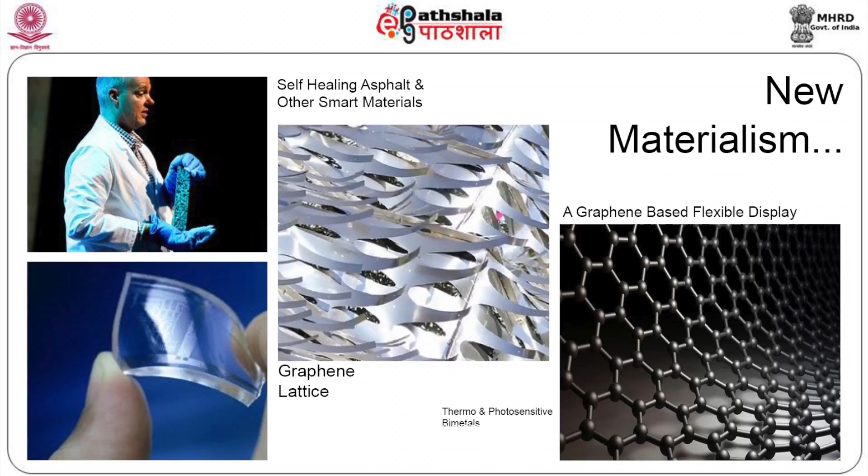Given that buildings are now no longer just buildings, they're also canvases for electronic images to flow, and any photographs of places like Tokyo or Hong Kong will exhibit that, and even Times Square in New York exhibits that really profoundly.

There are materials that haven't really been explored yet, like aerogels, the lightest artificial material known to man. These display fantastic properties of insulation which could really change the way we use energy in cities, and also perhaps change the way we build cities, with a direct impact on urban form, simply because a number of components of architecture that we now deem necessary would no longer be relevant to us.

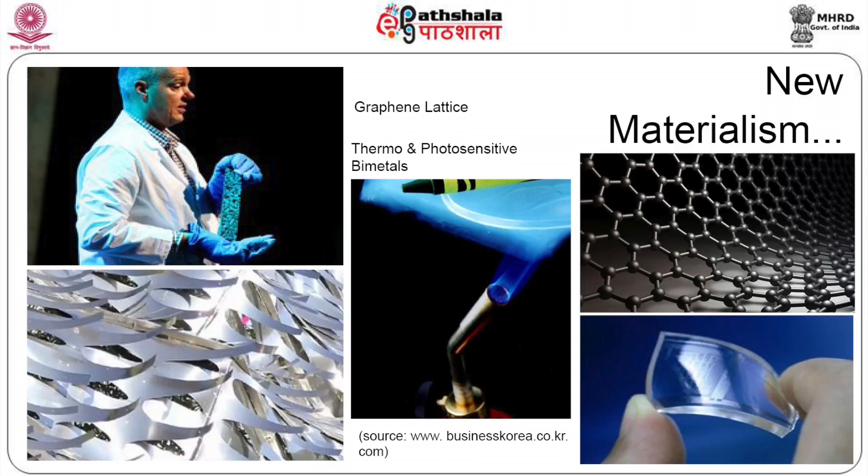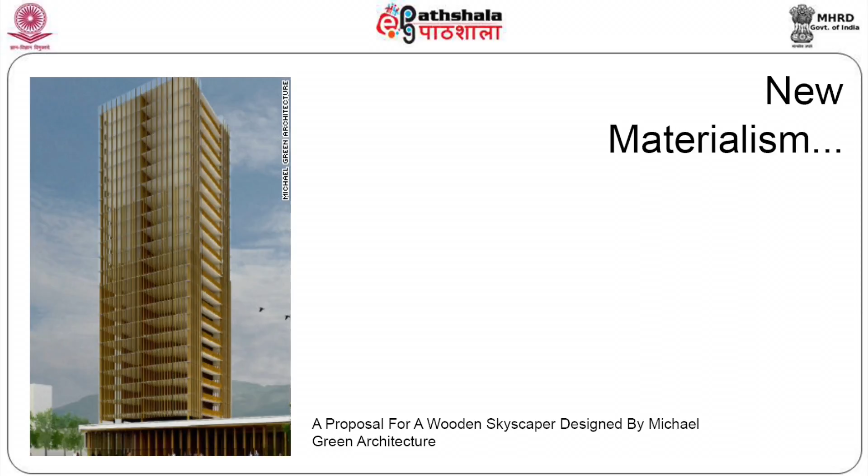And this is possible because we now have ways of strengthening the wood, making it fire retardant, and preventing insect attacks. Therefore, these old materials could be regenerated into something radically different, creating something that would be perhaps new but old at the same time.

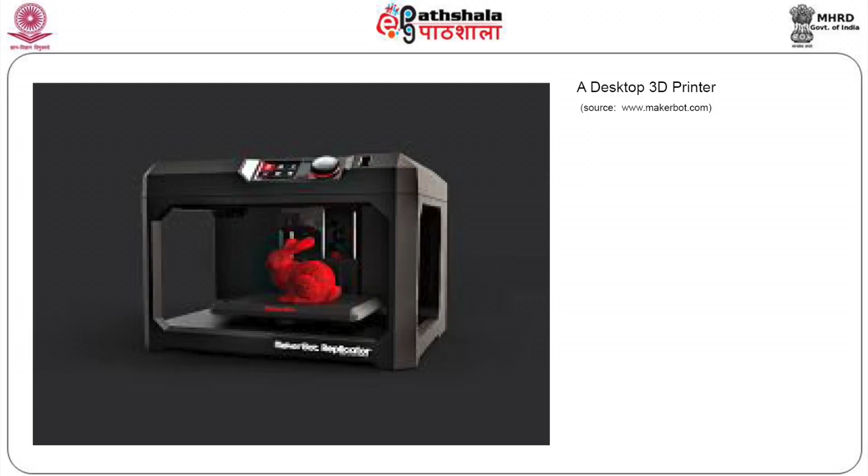Current technology that is very much on our doorstep is this concept of 3D printing. Now, 3D printing is an idea that has been around architecture for a while now. People have been printing small things, like that small bunny you see, for nearly 10 years now.

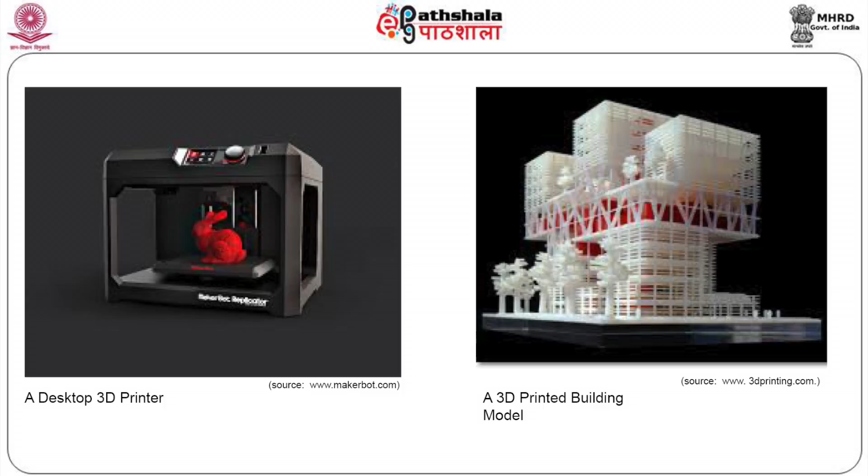And architects have already found uses for it in the building of models, creating a far more accurate model of buildings and spaces vis-a-vis perhaps a more human creation, such as manually built models.

This idea is now experimenting by taking it onto an actual scale, the scale of architecture, and we're already talking about components of buildings being printed three-dimensionally and then assembled at sites.

This is an idea that will radically change the way we build buildings, but it can also have great potential in terms of creating things like emergency housing, reshaping the way we perceive architecture, and ultimately perceive urban form as a conglomeration of smaller architectural forms.

This idea is a concept that is going to attack our consciousness in a very profound way in the next few years. As architects and urban designers, we need to engage with this particular form of technology and production to create something new within what is already an existing piece of tech.

Ideas of technology in the last decade and perhaps two decades is mobile technology. We have seen our devices get smaller over the years, and we have seen them become interactive and far more flexible in the last few years.

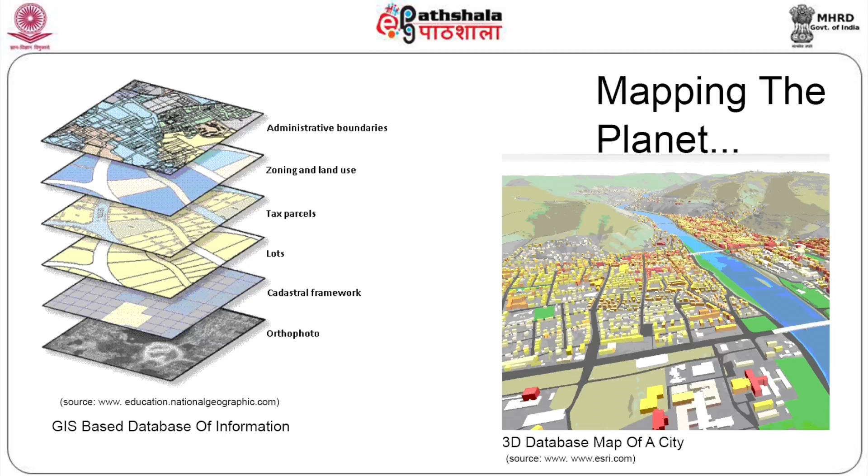An aspect of mobile technology that has emerged in the last few years is a concept called augmented reality. Essentially, this is an idea that stands between virtual reality and unfiltered perception. Augmented reality is essentially normal perception of space with data added to it.

A famous example of this is the Google Glass, which is something that has emerged in the last few years. The Google Glass essentially allows you to look at spaces that are available everywhere, but it also simultaneously overlays information such as weather, addresses, and so on, on top of your perception of what is actually there in front of you. This has great potential for our understanding of and interaction with environments.

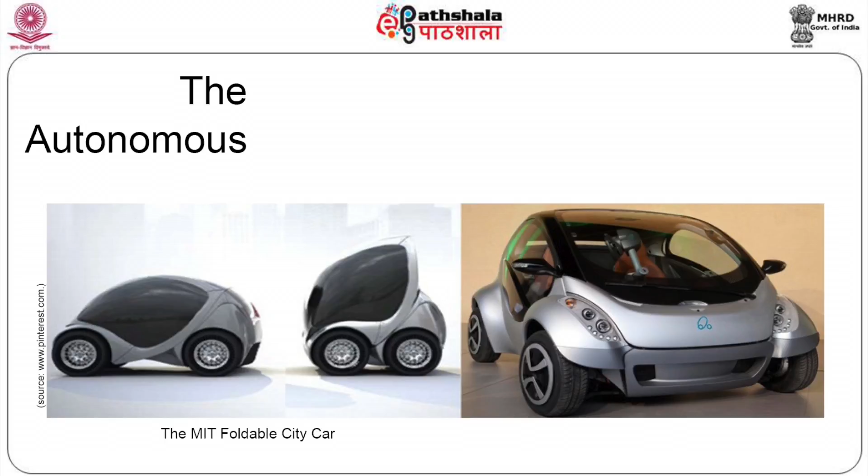In a more immediate sense, we already have vehicles that occupy lesser space and are essentially hyper-compact, like the city car proposed by MIT, which is a foldable vehicle that can fold and be placed to take up far lesser space than a normal car, simply because of its flexibility in form. This will have a perhaps unpredictable impact on the way we use movement and parking in cities.

And this is a very crucial aspect of urban design, because we are looking at large spaces of parking in the hearts of cities perhaps being used for something else. We can perhaps look at a kind of renewal of lost spaces that can be discovered and put to a more productive use.

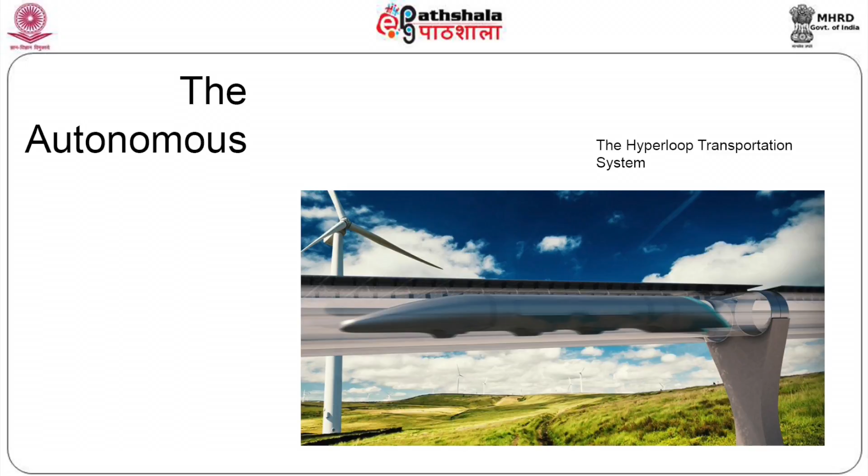There are technologies and concepts that exist in perhaps the far future. This is one of the Hyperloop proposals in this ongoing ideas competition, which deals with a system that can traverse cities and inner cities through a hyper-fast vacuum-based system. This is a concept that could once again result in changes of a completely unpredictable nature in the future of urban form.

An interesting idea whose time has already come is the emergence of the drone, or remote-controlled vehicle, as a method of delivery. This is an idea which has proved very successful in military applications, and we see the emergence of a number of commercial applications as well.

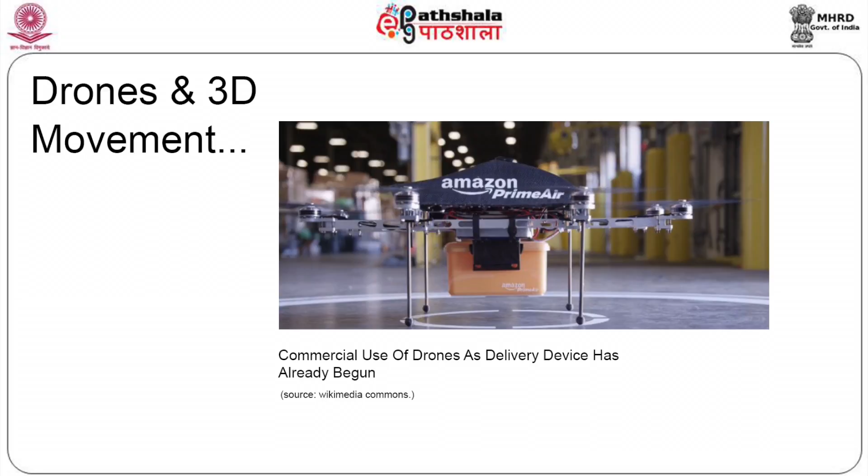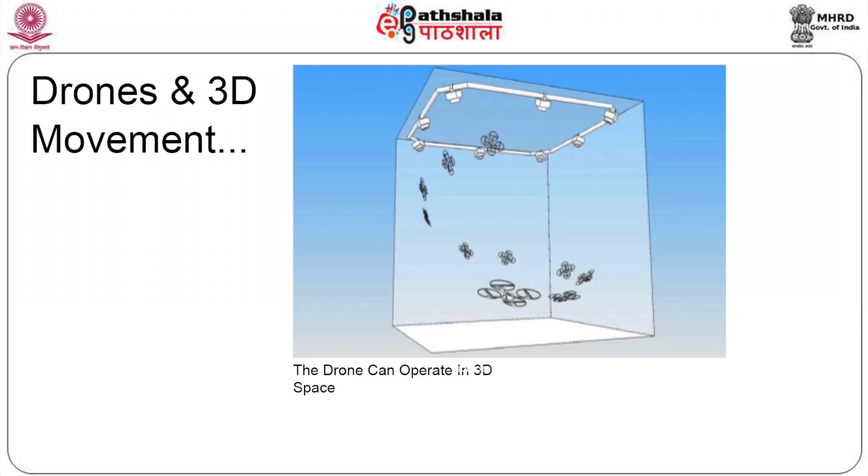But the drone is significant not for its ability to deliver objects, but the fact that it uses three-dimensional space to perform what are essentially regular tasks in an urban environment. If drones can radically change the way goods are moved within cities through three-dimensional space, we are now looking at movement in the city not just as a two-dimensional experience, but starting to see it as a three-dimensional one.

We're heading perhaps in some form towards some of the visions we saw at the beginning of part 1, ideas like the Jetsons, where we can probably start to look at three-dimensional movement through jetpacks or something like that becoming a viable mode of transport, because of our experience working with these drones, these remote control drones.

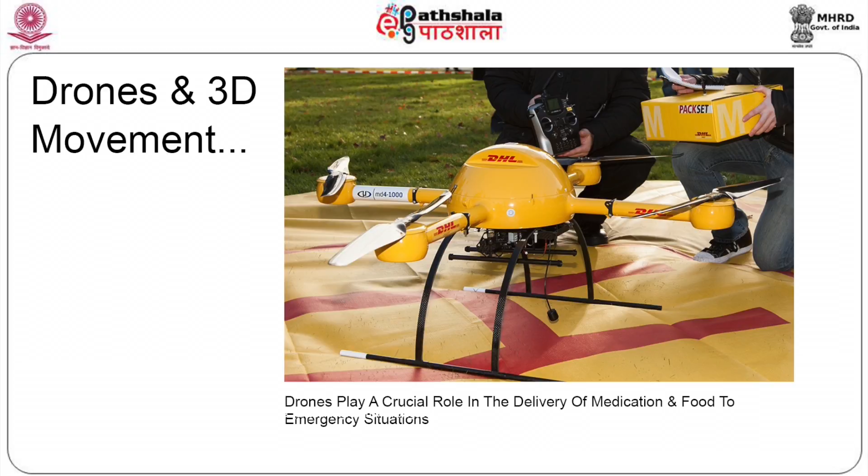They present a very interesting challenge as well as an opportunity to urban planners and to other form makers like urban designers. We've already seen, and this is another example of a drone supplying medicine and food to remote areas. This has immediate and almost infinite applications for the delivery of products and services.

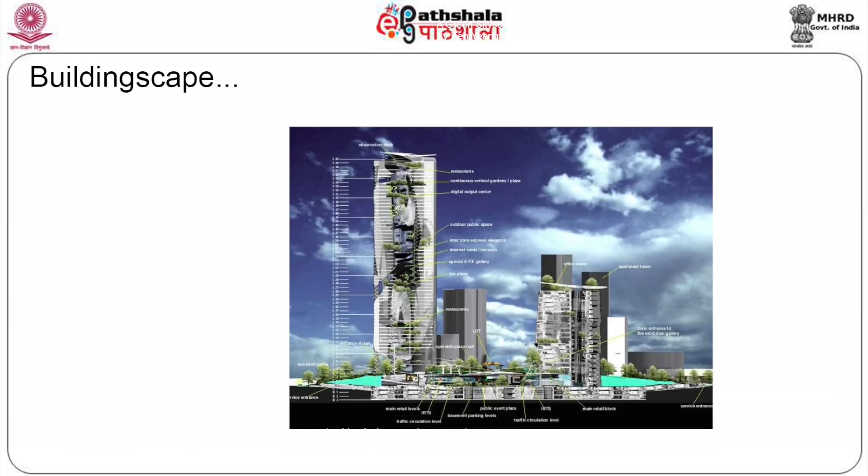Let's talk a little bit more about emerging concepts that are coming. An idea that has been floating around is radical landscapes embedded in buildings, such as Ken Yeang's many proposals over the years. We are also talking about buildings being infused with landscape, not just being settings for it, as in this project by Michael Joachim.

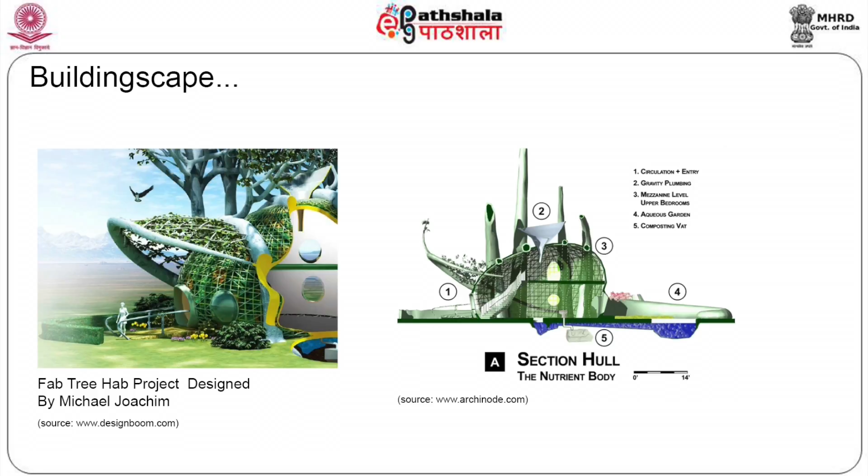Applied to an urban scale, this intrigues us because we can now build natural environments into artificial environments, and then start to connect all of these artificial environments, as seen in this very complex proposal given by Arup.

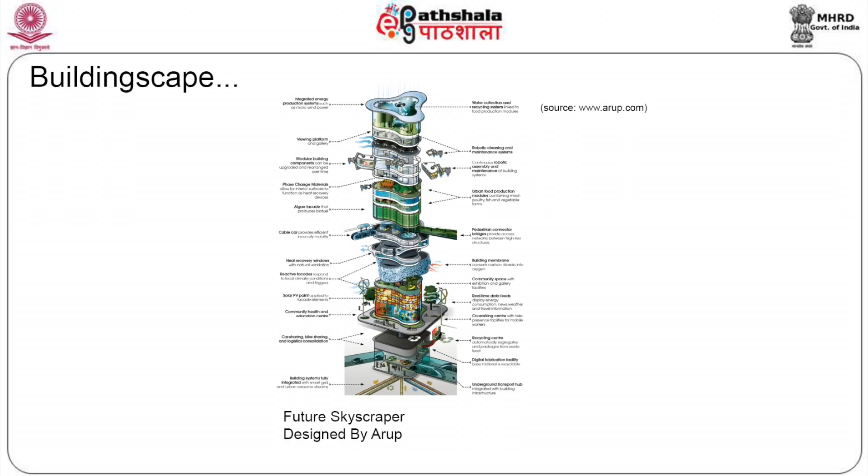You can start to see that buildings are becoming more than just buildings, they're becoming environments and cities in their own right. When interconnected with other environments, this could lead to some very interesting ideas, perhaps recalling things like Archigram.

We live in this age of big data. We're essentially collecting data on a scale we've never been able to before. What that's leading to is applications in cities which can lead to far better response times, married to our ability to now map things in new and innovative ways.

As we map these cities and put the data we've collected into them, we can now do incredible things, like anticipate problems and create solutions very early, perhaps even before they become a larger problem.

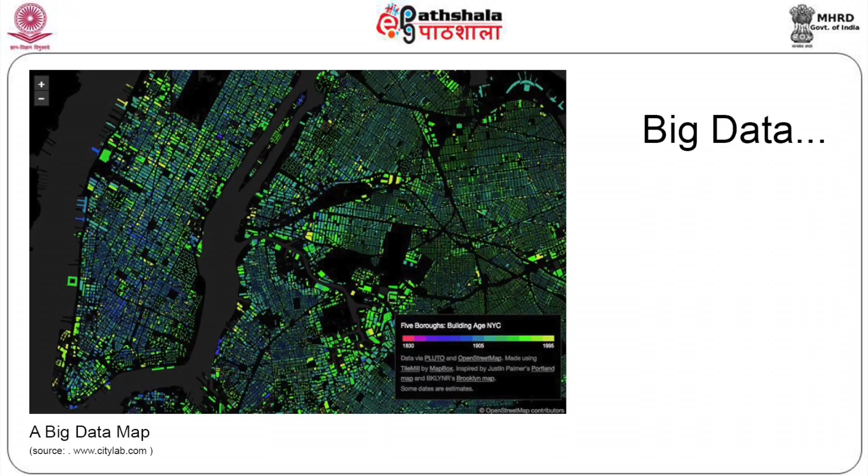We see large cities like New York, London, and Chicago start to use these tools and try to find applications for them to resolve issues like traffic, housing, economic disparity, and so on.

This will have an immense impact on urban form. It's going to radically change the way in which we perceive and plan cities, and ultimately, the way we design cities as well.

We can see these ideas reflected in a number of different maps produced by city governments to understand how their cities essentially work.

But there is a negative side. We're also dealing with the moral implications of collecting data on this scale, and we're forced to wonder if this is ethical and moral. This issue of privacy versus data is going to be a very significant urban question in the decades to come.

We also have this idea of the Internet of Things, which is basically an internet for machines. It's already begun in the sense that machines have started to talk to each other, your cell phone talks to your microwave and your security cameras.

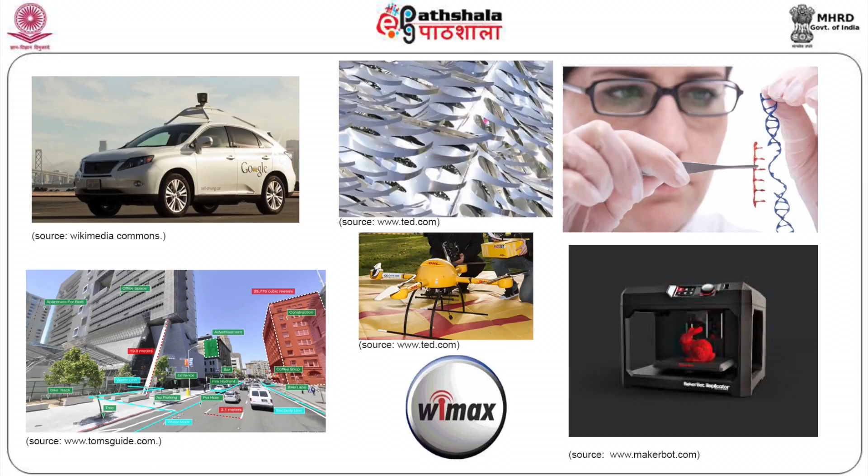So ultimately, if we put all of this different technology together, we are entering a city that is fundamentally different from the one we just left. These transformations that cities undergo are not new, but the pace at which they are occurring is getting increasingly fast.

All of this technology that we've spoken about feeds against each other, and we're headed to a new city and a new understanding of cities that could perhaps be wonderful, or perhaps dangerous, or perhaps something that is unknowable.

But the fact is that the city has always been unknowable in its own way. All of this technology is perhaps making it increasingly available to us, but also making it complex to a degree that doesn't allow us to be masters of the city anymore.

We may have to cede a little bit of our control to our own inventions and our own perceptions of the future. Thank you.